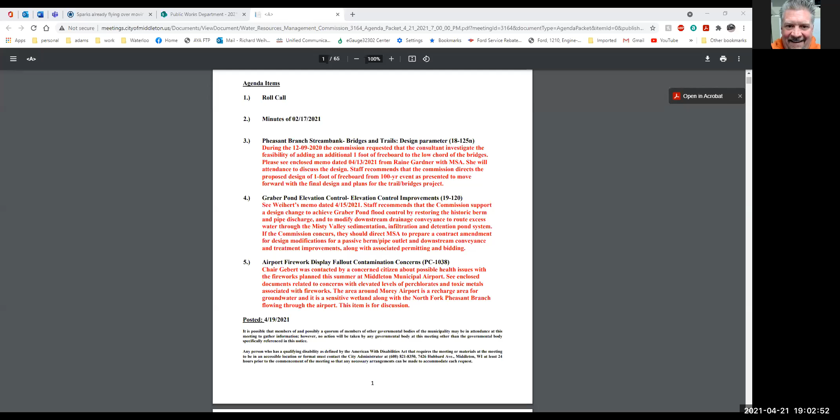At another time to talk about Pheasant Branch. But we wanted to present the findings of the study to the commission before we went to our third public information meeting for this watershed study. So we wanted to inform you all before we put this out to the general public.

So with that, Lauren does have a presentation to share. Does she have the ability to share your screen?

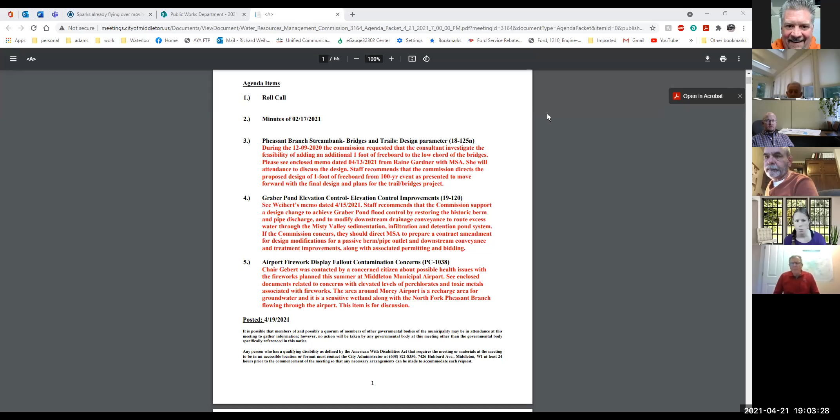I can stop sharing. Not certain how to allow her to do that. I think. Yeah, it's not letting me. Yeah. It said the host has disabled participant screen sharing, Rich. Okay. I don't know how to. I don't either. We'll see if we figure this out. If anybody's got insight. There's usually a little button at the bottom of the screen that's like a little shield and it says something like security. I think I've turned who can share on. Yep, now it's letting me do it. Excellent, thank you for that. All right, so can everybody see the screen that shows a full screen presentation? Yes. Okay, wonderful. Very legible.

Okay, excellent news. All right, so as Caroline mentioned, I am Lauren Striegl. I am an engineer with the City of Madison. I work with Caroline and Janet and Greg, both of whom are here. And I'm going to give you a brief update on the Strickers Mendota Watershed Study. This presentation was adapted from one that we have been sharing internally with agencies, and so it contains a little bit more background than just a straightforward sharing of solutions.

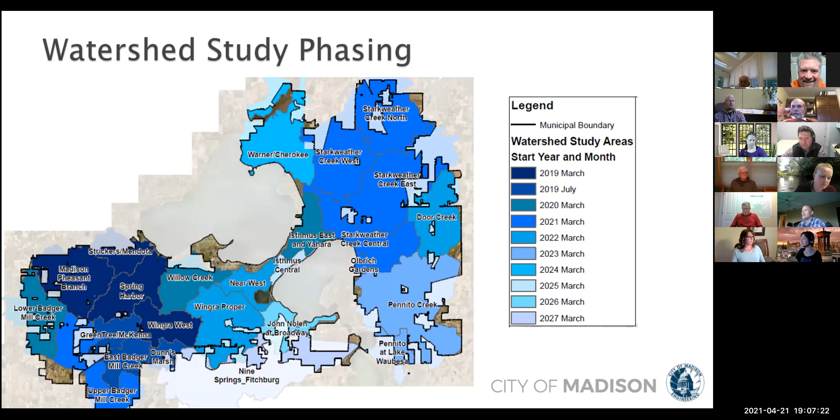And all of those were watersheds that were hit particularly hard in August of 2018, although they were by no means the only ones that suffered quite a lot of damages during those storms. As you can see, this spans 8 years as of right now. So this is a long-term project for the city. We are committed to getting all the way through it, but it is certainly not something that's happening overnight for us.

So to give you a little bit more detail on what those round 1 watershed studies looked like, 3 of them were bid out and were largely completed by consultants. One was done in-house. Caroline Burger led that in-house effort on the Madison Pheasant Branch Watershed Study. The Spring Harbor Watershed Study was completed by AE2S and led within the city by Jojo O'Brien. Strickers Mendota and Wingra West Watershed studies were both done by Brown and Caldwell. I led the city side of the Strickers Mendota study, and Phil Gaebler in our office led the city side of the Wingra West study.

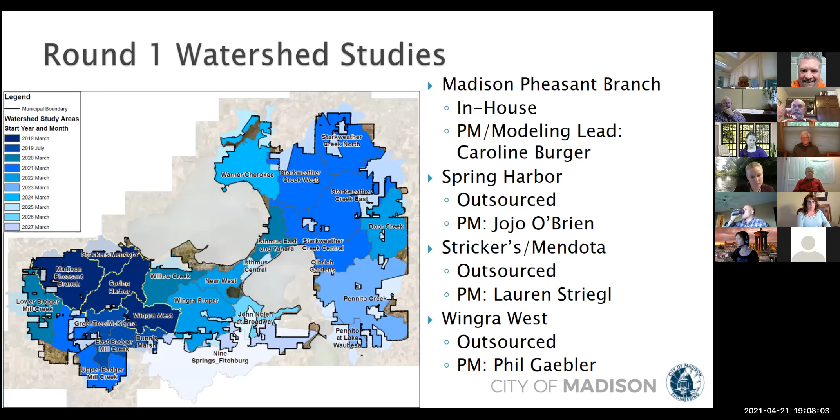Ooh, that was an animation. So this is a look at the schedule, and what this slide is really trying to get across is just how long these things actually take. Why is it going to take us 8 years to get through all of the different watersheds in the city? Well, this is why.

We started this whole process in 2019, and we initially expected to finish it up about a year later in 2020. What we actually found is that there was an additional year in there. Now, this is not something that we're finding in future watershed studies. A lot of this was kinks having to be worked out.

Most notably, we had an issue with the software we started out with. Some of you may be aware that we started this whole process in InfoSWMM and found about halfway through the building of the existing conditions model that that wasn't a great software to use. So we had to have our consultants that were working in round one switch all of their models into a totally different modeling framework. We went to XP SWMM. So it did pad the schedule by about a year.

We are hoping and planning at this point to finish up this first round of watershed studies this summer or fall.

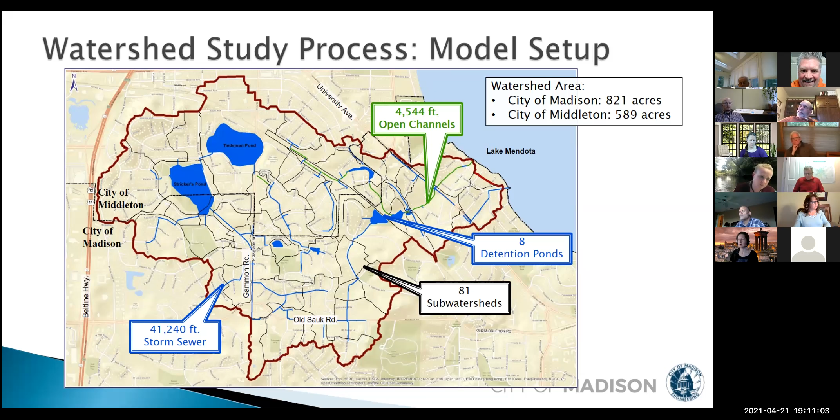And you can see from this that they did kind of a lot more detail on the city of Madison side as we were trying to get a much tighter breakdown of where problem areas were within the city of Madison. And then lastly, about 41,000 feet of storm sewer underground.

So we didn't want to have our consultants just go out and try to build a model with absolutely no background information. So we gave them some data to start with, of course. The first thing that we did was collect a whole bunch of citizen reports. So after that August 2018 storm, we put into place a really extensive flood reporting data collection program.

And we gathered citizen reports within this watershed alone everywhere you see those little blue dots. We also sent our surveyors out. We provided Brown and Caldwell a whole bunch of data from our records, but our data isn't perfect. It's far from perfect. And so in situations where we didn't have great data, where Brown and Caldwell was very concerned that the data that we did have might not be good enough to get really good answers for us, we sent our surveyors out to get a little bit more information.

Third, we scheduled some on-site focus group visits. I'll talk a little bit more about this when I run through pretty quickly our public outreach effort, but this was a new way that we found of getting in touch with people and getting really good on the ground information. So prior to COVID, when we were still all able to meet face-to-face for these first four watersheds, we did actually have our consultant team go out, and Jim is very familiar with this. I think he was the one person that attended all four of these.

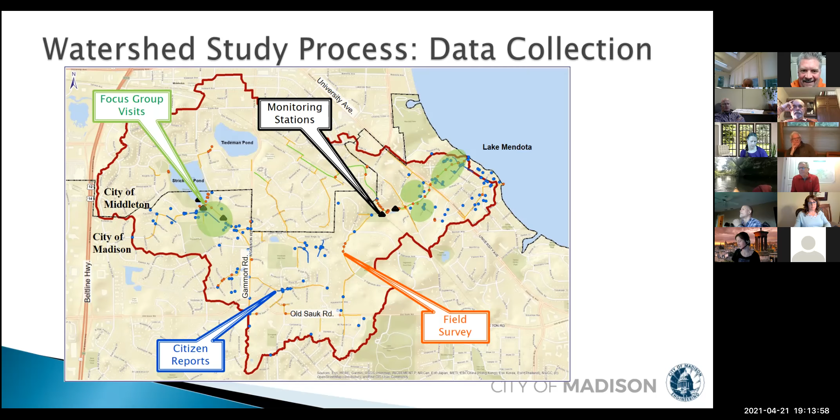This is just a quick synopsis of some of the calibration data, to give you an idea of what this looks like. I won't spend too much time on this because this group is, I'm sure, much more familiar with calibration data than some of the other groups that have looked at this. But this is an example from the Strickers Pond gauge that we installed for one of the calibration events.

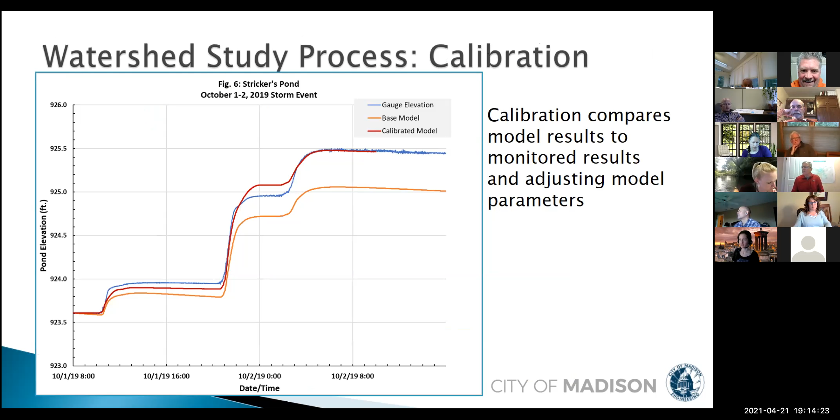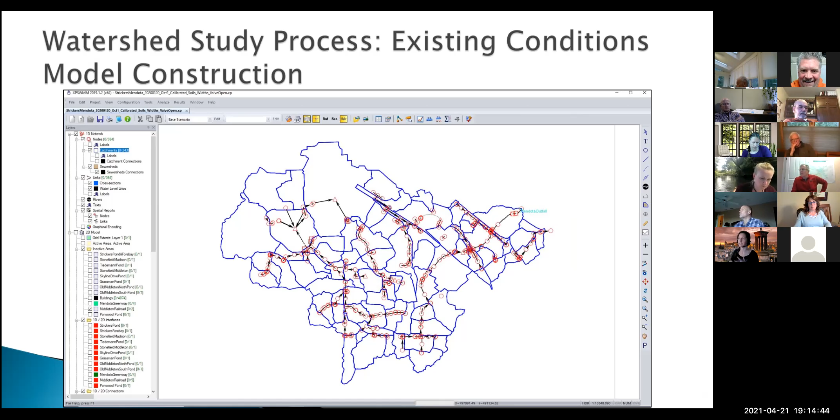This gives you an idea of what the actual XP SWMM model looked like once it was constructed for existing conditions. Like I said, this was one of the simpler watersheds, but it was by no means simple. This was a big model with a whole bunch of different nodes and subbasins, and you can see just how complex it is based on this screenshot.

I wanted to touch briefly on the public input process that we did. This was a new public input process developed just for this watershed study program. So we laid out a framework wherein we would have at least 3 main public input meetings, as well as some individual focus group meetings on site to really get a breadth of public input.

So we started by giving a very broad 'what is a watershed? What is a watershed study? Why are we looking at your watershed' type of meeting in early 2019. We then met with our focus groups on site later that year, at the transition between summer and fall. We gave the neighborhood a view of our existing conditions model in early 2020, which was interesting - this was about a week, if that, before we all got sent home completely for about a year. So we did manage to squeeze this one in under the wire, and it was an in-person meeting.

We were able to talk to residents about what our maps looked like and whether they matched what they had seen in past events. Lastly, we're going to have a public input meeting in May, so in about a month. That's where we're going to try to share the solutions that Brown and Caldwell has developed for this watershed with members of the public, and of course that will be a virtual meeting.

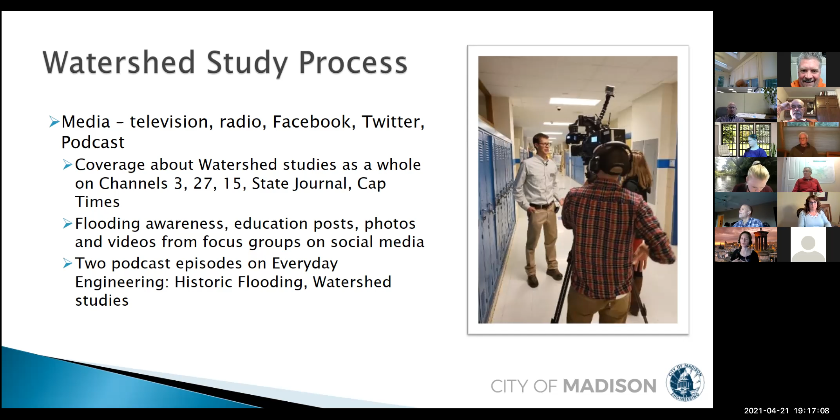We also have a new podcast that Hannah has been pioneering, where she has really pushed flooding issues in that podcast in an attempt to reach a different audience that we might not have reached in the past.

So this is, I'm sure, the best part of this presentation. As we started to get into the existing conditions model and getting flood inundation maps and realizing that we wanted to share them with the public, we spoke to our legal department, our attorneys, and said, can we share all of these inundation maps? And they said, we really need to provide some context because these are pretty technical maps, and we want to make sure that whoever's looking at these isn't taking them as gospel.

These are models. These are not predictive of anything. And we don't want to be in a position where somebody down the line floods or doesn't flood and says, well, your model said I would or wouldn't, and I was making these decisions based on that information. So I hate to actually come back to this, but because I am going to show maps, I have to go through the legal disclaimer.

I will summarize it - essentially it says exactly what I just said. These are not predictive tools, they're planning tools. They're not intended to let you identify a house and say it definitely will flood if this rain happens, and definitely won't if this other rain happens. They're just to give us an idea of general patterns. And the city of Madison assumes no liability if somebody misuses them.

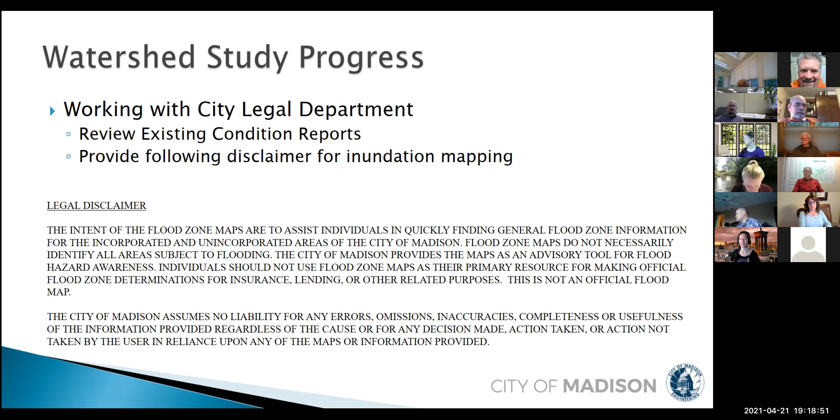So this is a great big map of the existing conditions, 1% chance or 100-year event inundation throughout the first 4 watersheds that we studied. You can kind of see Striker's watershed, just the Madison portion, not the Middleton portion. Up here at the top you can also see, taking up the most space, the Pheasant Branch watershed. Here's Spring Harbor, and down here is Wingra West.

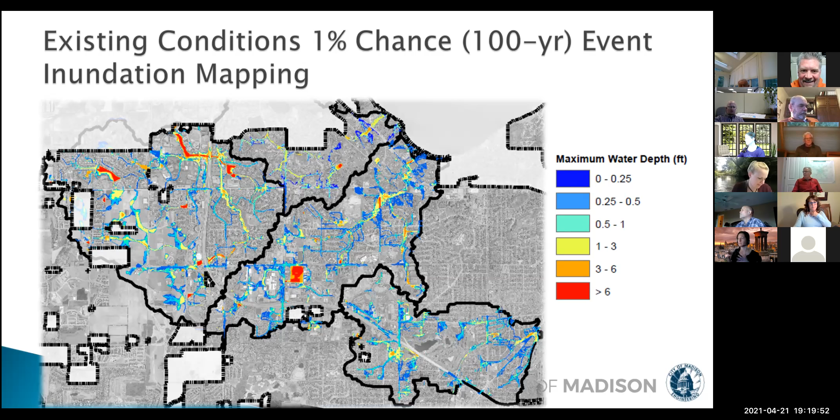We did standardize our inundation maps. We spent a lot of time thinking through what would be the most useful division of depths for us as well as for the public, to help us all figure out whether we were or weren't meeting our flood goals - I'll go through those briefly in a slide or two. All of these depths were standardized and helped us visually latch onto that information pretty quickly.

Just to go through what we had our consultants look at, we went through the whole range of events, everything from the 1-year through the 100-year. We get asked a lot whether we're considering climate change, and whether the 100-year event 20-30 years from now is almost certainly not going to be the 100-year event you're looking at today. We definitely know this is a possibility, if not a probability, but it's hard to quantify something we can't predict. So the way we've chosen to address this at this point is to take a look at each of these watersheds under the 500-year event.

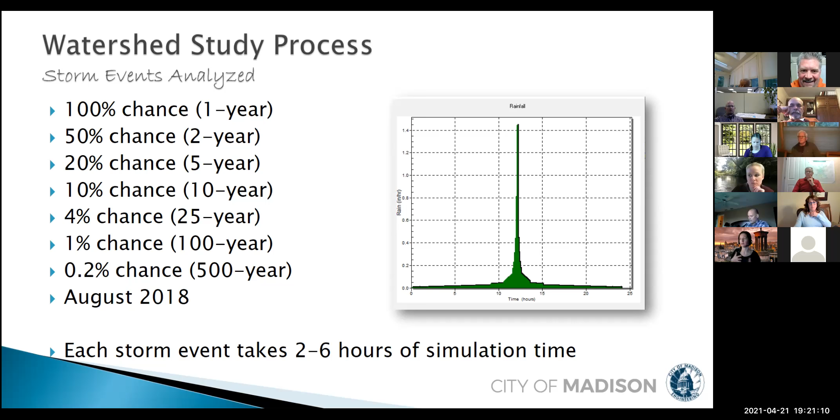Lastly, we did have our consultants model the August 2018 event, using rainfall data that a professor at UW, Professor Dan Wright, put together for us based on radar from that event. So we got a really good spread in areas that we didn't necessarily have rain gauges set up at the time. We largely did this because it's a great event that people remember and were able to quickly respond to us when we showed them the maps and say, yeah this happened, yeah this didn't so much happen, you should adjust this.

So briefly, what were we actually trying to evaluate when looking at these maps? They're very pretty, but how are they useful? We put together a whole list of targets that we were trying to hit, and used this to evaluate in each watershed, and in each place within each watershed, whether or not our infrastructure was robust enough to withstand flooding.

For the 10% chance or the 10-year event, we usually like to convey that within our underground storm sewer system. So what we wanted to make sure was that we weren't seeing surcharging out of the storm sewer system past some nominal surcharging as water gets into inlets. We didn't want to see significant surcharging onto the roadway.

For the 25-year event, or the 4% chance event, we were really focused on maintaining emergency vehicle access. We wanted to make sure that larger emergency vehicles could still get through roads, particularly main arterial roads like Gammon in the Striker's Mendota Watershed during that 4% chance event. Our criteria there was 0.2 feet or less of ponding at the center line of the road.

For the 1% chance event, we were targeting having no structure flooding. And we want to have all of our greenway crossing culverts sized such that those crossings can carry the 100-year event without overtopping the road.

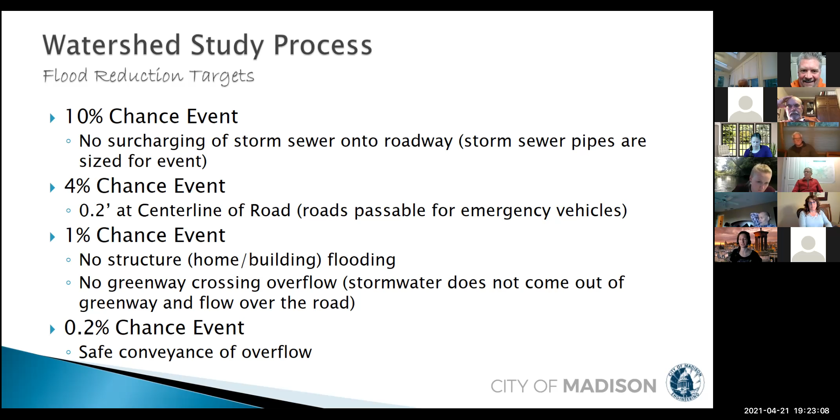Then lastly, for the 500-year event, we know that's huge, and most if not all of our infrastructure is not sized for that, and in a lot of cases cannot be upsized for that, especially in developed areas. So what we were looking to get there was just safe conveyance of overflow during that 500-year, 0.2% chance event.

This is just very briefly what we did once we had all of these existing conditions models and how we took those to a proposed solutions place. So this is a really quick rundown of what we did.

Essentially, once we had those existing conditions models and knew where our problem areas were, we had the consultants meet with the engineering staff internally in the city to brainstorm ideas. Nothing was really considered off the table. We wanted to look at what it would take for each of these problem areas to meet those goals that we went through a slide ago.

Then our consultants went through, refined the ideas, started to conceptually size all of these mitigation measures, all of these flooding solutions, and then took those solutions and plugged them into the model.

And then they began some iterations, kind of back and forth with engineering staff. What does the model say? Are we meeting what we want to meet? Do you want us to keep going? Are we getting unreasonably expensive or just into something that we can't actually build?

And this continued as we spoke internally with our agencies. This continued until we arrived at a set of solutions for each of these watersheds that we felt were buildable, were reasonable, and were something that we could present to agencies and to the public.

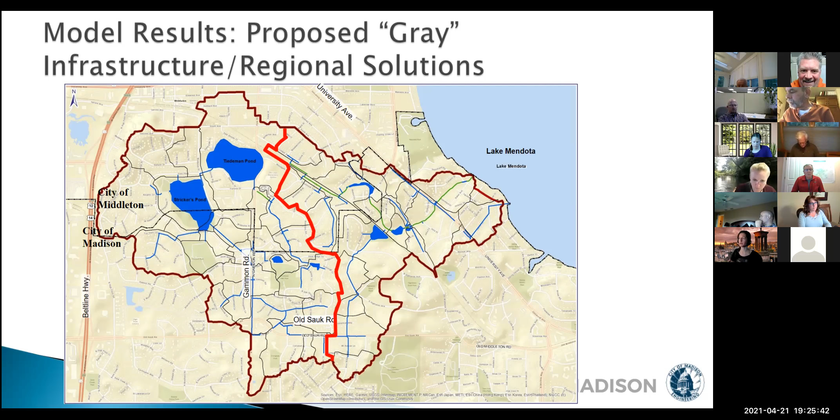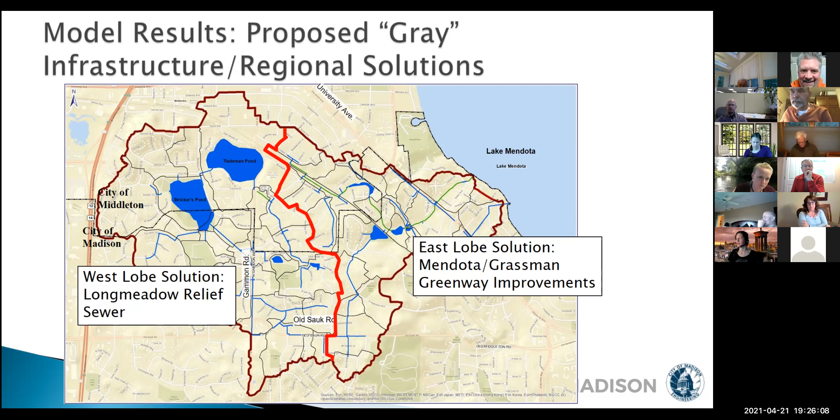The one that I will spend more time on, that comes second, and is probably of most interest to this commission, is the Longmeadow Relief Sewer. That was the West Lobe solution for the Strickers-Tiedemanns area. One that only affects our property, and that the City of Madison is actually moving forward with into design, is improvements to the Mendota Grassman Greenway.

So I'll go over that one first because it is completely contained within Madison property. What was really important in this area, in the eastern part of this watershed, was to prevent structure flooding during the 1% event. There are several condos out here. This is the Hickory Hollow Condo Association that have reported a lot of flooding in the past. In addition, the Julia Street and Julia Court area has also reported a lot of flooding. Some of that is due to groundwater, but a lot of it is due to surface water.

So when we asked Brown and Caldwell to look at this area, what they found pretty quickly was that this greenway, which is very wooded and not very well graded, was ripe for improvement. What they ended up proposing was essentially lowering and better sloping this greenway, and then increasing the culvert capacity underneath the main roads that cross it, to try to get water as quickly as we can out of this greenway and into Lake Mendota downstream.

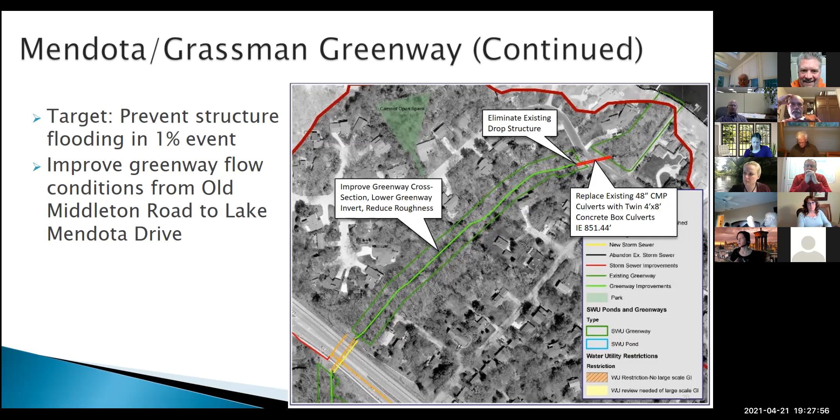So what this looks like in the western part of the greenway is essentially improving that cross section within the greenway and adding a new parallel culvert right next to the existing box culvert that's in place there. Downstream of that, it looks like again improving that greenway cross section, lowering it, reducing the roughness through there, and then replacing some old corrugated metal culverts with higher capacity twin box culverts downstream.

On the western side of this, what Brown and Caldwell found was the most efficient solution was to install a parallel 60-inch, or 5-foot, relief sewer that runs right adjacent to an existing City of Madison storm sewer, shown in orange here, and will cut off the hydraulic connection at Harvest Hill from the old storm sewer and divert all of that water through this new 5-foot diameter storm sewer. It will discharge into Stricker's forebay, as does the existing storm sewer, and then into Stricker's pond.

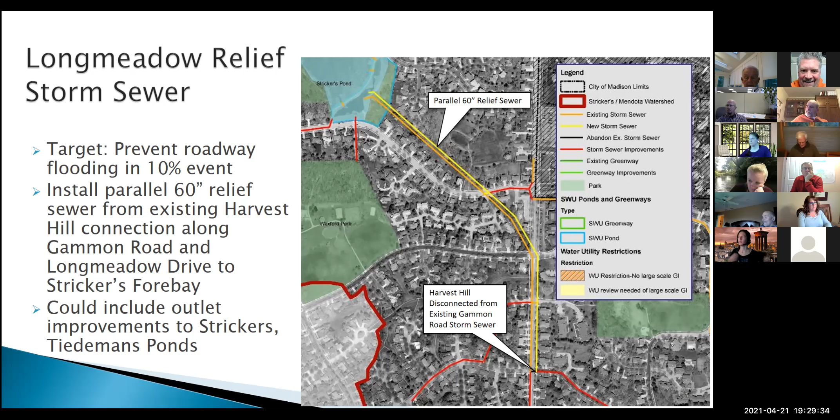One thing that Brown and Caldwell recognized, and that the City of Madison recognized, is that this would involve conversations with the City of Middleton. Obviously, Middleton is downstream of this solution, right downstream of Stricker's Pond. So we're aware this might involve parallel conversations about improving the outlets to Stricker's Pond and Tiedemans Pond, to make sure we're mitigating any potential negative effects to the City of Madison or Middleton. Brown and Caldwell did find that there were pretty negligible effects on Stricker's Pond's water surface level, but we know these conversations have to be had.

Lastly, I want to touch on something really important, if sometimes overlooked. These big regional solutions are great and critical, but they're nothing if we can't get the water to where it needs to go to take advantage of them. So Brown and Caldwell looked at this watershed and noted everywhere local pipes need to be upsized to get the most benefit from our big regional solutions. Everything you see in red, barring the border of the watershed itself, is pipe that eventually has to be upsized. This is a multi-year, probably multi-decade process. We'll get these projects done through resurfacing and reconstruction projects, but this isn't going to happen overnight. Even if we installed these big regional solutions tomorrow, this is an ongoing process for each of these watersheds.

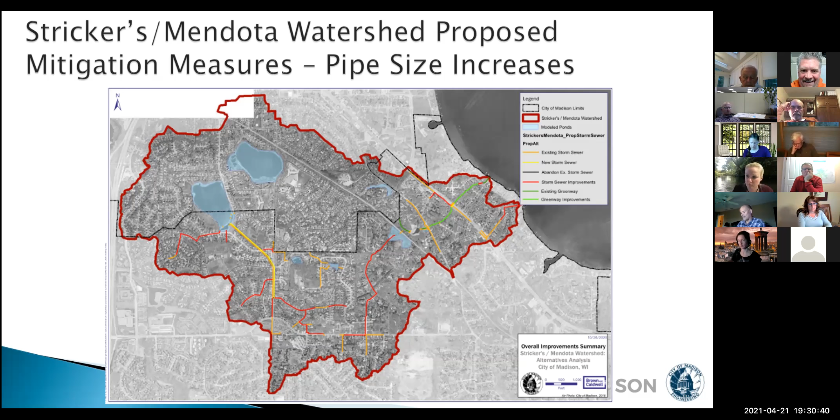So what are we doing next? Aside from PIM3, where we present all this to the public — well, this is kind of an outdated slide, but it does mention we still have to meet with agencies and stakeholders. We did that, having a whole bunch of conversations with other agencies within the city that were really concerned about this, Parks being the big one. We had to go through anywhere we proposed detention in one of our parks and talk to them. Stakeholders includes the City of Middleton, and that's why we're here tonight, to go through this and see what your concerns are and take those into account as we move towards finalizing everything.

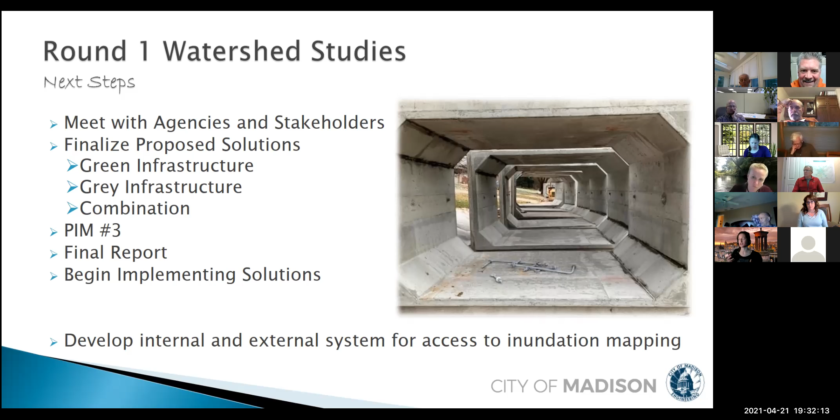So Brown and Caldwell, once we complete this conversation and go through PIM3 to get input from the public, will move on to writing their final report. We want to make sure every stakeholder's voice is represented in that report. The last step, just one bullet here but with a wealth of information, is to begin implementing solutions. For this watershed, we're moving forward with the Mendota Grassman Greenway improvements, but a lot of these solutions we're just starting to figure out when we could even begin implementing. So even though it looks simple and is written easily here, this is going to be, again, a multi-year, if not multi-decade, process to bring these solutions into reality.

So with that, I am finished. If you have any questions, I can answer them, Greg or Janet can answer them, or Caroline can answer them. We're all kind of at your disposal — whoever is best equipped will jump in.

Well, thank you, Lauren. I appreciate the speech here, or whatever this is, and you did a great job with it. Yeah, thanks, that was good. Is there any questions you have for Lauren?

I have one question. You didn't say anything about decreasing the amount of water by infiltration or something like that. It looks like most of your solutions are transporting the flood peaks more efficiently. So in the end result, it's like Mendota is going to get more water faster.

That is an excellent point. I'm sorry, was that Warren speaking? It's a little hard sometimes for me to see, but that ties in really nicely to a part of this study I didn't speak much about.

There's a component of this that is more green infrastructure focused — we call it the volume control infrastructure portion. Caroline is the lead on that. In parallel to all these solutions, Caroline is looking at the Pheasant Branch watershed, and we're also having consultants do this in a couple other select watersheds, namely the Wingra West watershed and the Willow Creek watershed, to see how we could implement a large-scale green infrastructure program in the City of Madison and how that might affect some of these proposed solutions. That study is still in its infancy and we don't have data on it tonight, but it's definitely something we're looking at. We'll have more information to come, especially as Caroline wraps up the Pheasant Branch watershed study.

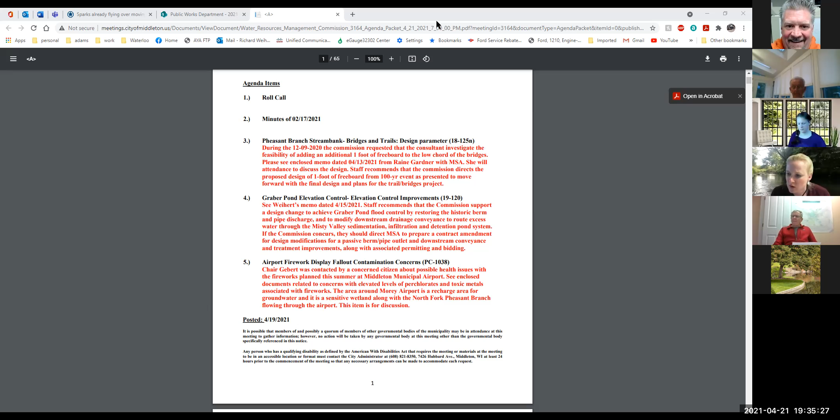Raine, up to you. Thank you again for having me. Excited here to provide an update to everyone as it's been a few months. So I don't know, Rich, do you by chance have the memo that you can pull up or do you want me to share? Maybe. Because I can definitely try to share here.

Looks like I can. So back in December, we had a good discussion on our analysis thus far on the various bridges along the corridor. And what we were able to do then was take some past study information on the corridor for the bridges and get you some approximate and rough ideas as to what we were looking for as we look forward to designing and setting the bridges on new abutments and what elevations they would need to be set to.

And so when we left that meeting, the direction was, at a minimum, we wanted to make sure that we got the bridge abutments, that bottom low chord, 1 foot above the 100-year storm event. And then also to consider what 1 more foot above that elevation would look like for the various bridges. And so over the last month, we were able to work with Cardno and the model and get our information updated into it for each of the bridge locations and do our analysis even further with actual data from the corridor now.

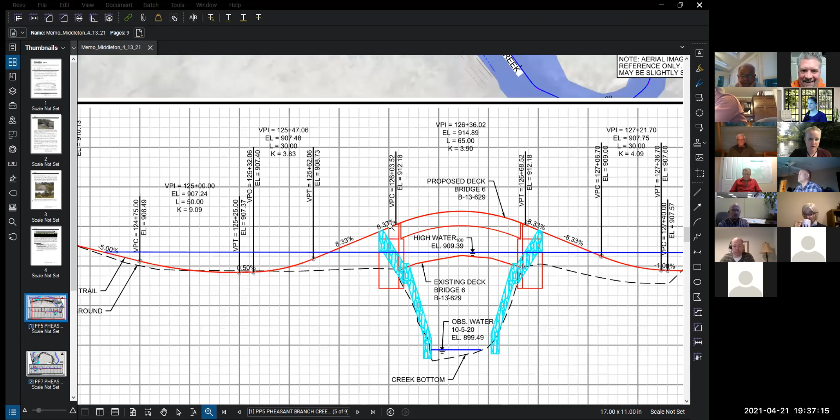And so the first thing that we looked at was setting the bridges at that 1 foot above, so that low chord elevation. And if you remember, the bridges are that arched frame. I'll actually try to zoom in a little bit more. They're the arches. And so what we're looking at is getting that 1 foot at the lowest point of the bridge above that 100-year storm event.

And so with that, we were able to look at all the bridges except for number 4, which we need to get the final survey information in, which we are working on this week, and working on that final modeling piece. So I know that one bridge is missing from this data set, but all of the other ones are included. And we were able to set all the bridges as shown in the plans that were attached. And we looked at how we can tie in the side slopes for the trail up to it, and what that would look like, because last time we talked about several different options as to how the trail would tie into the bridges when they're set up this much higher.

So with that, I'll quickly jump into it: we did go down the path of trying to look at that additional 1 foot above this elevation to get 2 feet above, and what that would look like and what that storm protection would be. Unfortunately, the model was only built out to the 100-year event. So we were able to look at what 1 more foot would do, but not really give you quite the guidance as to what that storm event would look like, and what that protection level would be, I should say.

So with that though, going up 1 more foot in this design, you can already see that with us trying to tie in these bridges at the elevations that they are, this 8.33% is basically our maximum slope that we really want to go to with tying and feathering in the trail to the bridges. So if we were to set the bridges 1 more foot up, it would really draw out that connection into the existing trail. And the one thing I want to point out is that in all, except for 1 bridge, the bridges will still at the 100-year event have some sort of level of bypass flow.

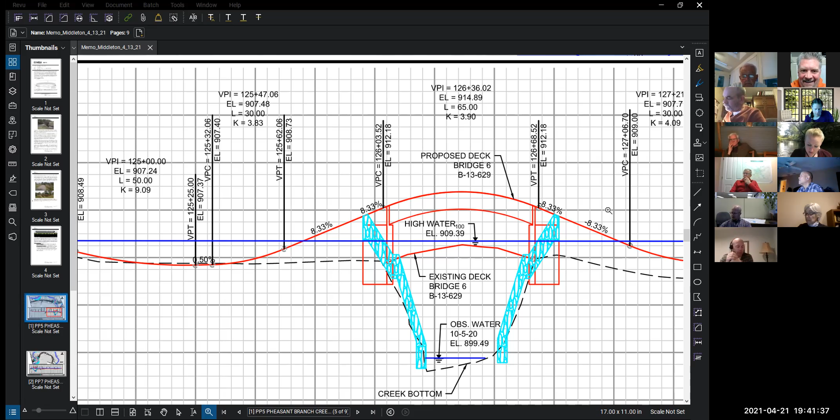So when we had talked back in December, we had provided some rough costs as to what these options would look like. And with this recommendation, I had provided that similar chart shown in here with updated costs based on the numbers now that we do have. And when you look at all these bridges, we did add in the cost for riprap and railing, because we are going up so steep, we will need some additional railing coming off the bridges for safely keeping people on the trail leading up to the bridges. And obviously there's the riprap to protect the abutments.

And so when we spoke on the cost in December, we noted that originally the city had spent around $70,000 to repair the bridges to get them back to the state that they're in right now. And we recognized at a base cost minimum, you would need to spend $522,000 to set the existing bridges back on their abutments. And that was with a concrete abutment on top of helical piles as our recommendation.

Now that we know roughly where these bridges are going to be set with the 100-year 1 foot protection, with those costs and the riprap and the railing that's needed, it would be around the 717, so roughly just under $200,000 of additional cost to get the bridges up above the 100-year for that additional protection, which overall is very similar in cost to what I think we presented last time, not a whole lot more, and you're getting that benefit from raising them up. Are there any other questions so far?

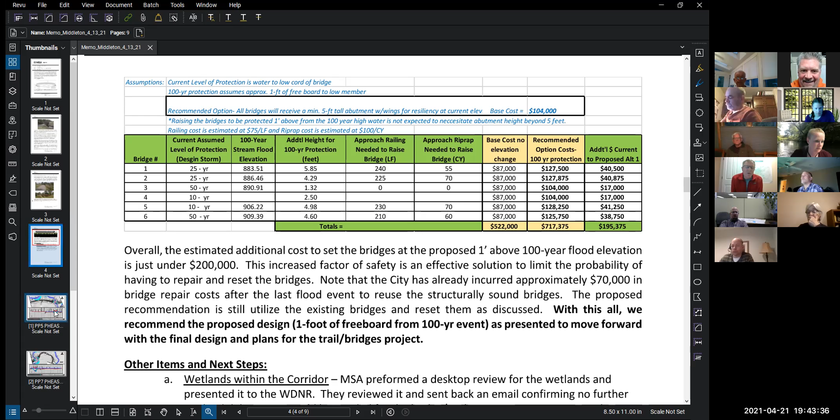Yeah, this is Jim. Just wanted to clarify, make sure I understand that 8% slope you looked at. Does that exceed ADA requirements? So when it comes to trails, we actually can exceed that 5% slope because of the terrain and the topography and tying it in. So we can actually get up to that maximum percent. You actually can go higher than 8.33, but we don't recommend it. Yeah, because 8.33 can be pretty steep already. Yep. But in this case, we can apply the guidelines and requirements, we can do the 8.33% as we tie into those bridges. So that is what we would be at with your recommendation. Is that correct? Correct.

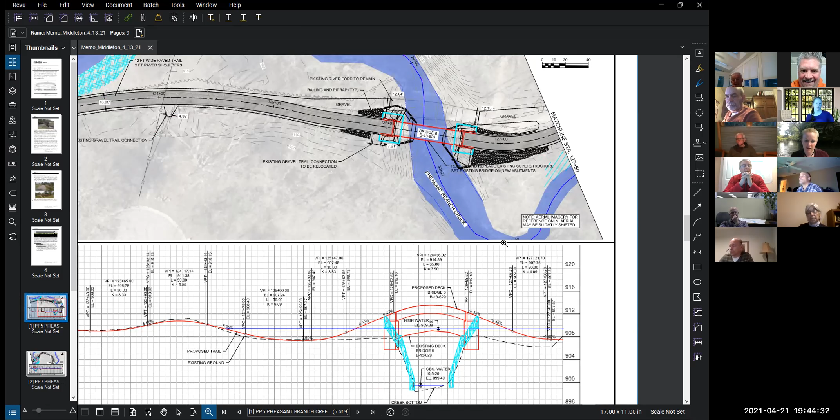If that wasn't acceptable to have that steep of slope, we probably would be looking at doing some sort of boardwalk at a lesser slope to tie in. Because if we were to fan out that slope and lessen it, we're going to be tying out further, which obviously then reduces the capacity of the bypass flow, which then we might be wanting to look at the need to do the boardwalk, which would allow the water to go underneath it, but obviously adds a fair amount of cost to the overall project.

I guess I wanted to hear from Mark. I assume the parks people are more in tune to this situation, if that 8% is acceptable to the parks people or not. Given the length that 8% would be at, that is what we're okay with.

I know, if you were to go over by PPD on the South Fork Trail that goes up behind there, goes up that hill, that is pretty similar in terms of percentage slope. And then we've got little flat areas before it goes into that slope again. So for that certain distance out of that 8.3, yeah, we would be fine with that. It's definitely preferable, like Rain said, than to have a boardwalk. That's for sure.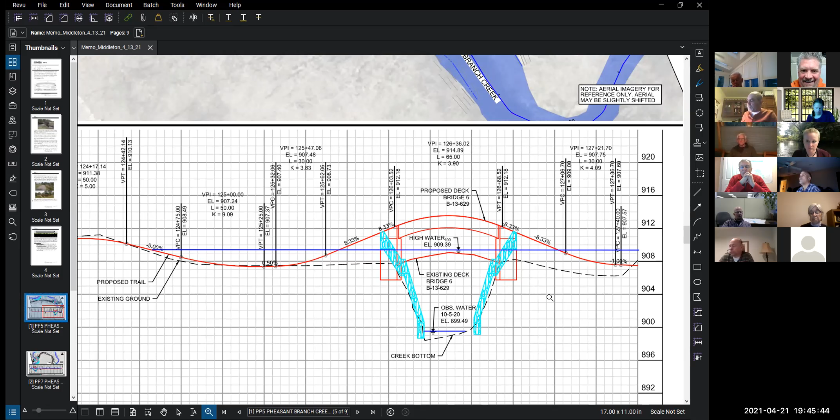Is this true for each bridge crossing, or just only certain ones that we'd be at that? I think actually all of them have some level of that 8.33 tied to them. Do note though that the bridges themselves, because they are arch bridges, from one end to the center of the arch is actually 8.33% too. So the bridges actually have that same slope. So we're just matching into that. I know biking up an 8% slope, that's a climb if it's too far.

Okay. With that, I just had a couple other points. Like I said, we're working on bridge number 4 to model it, to understand where that one needs to be set, and hopefully we'll have that information by the end of this week. And so that all impacts, in general, if you're going to go with the recommendation we're providing, we'll have to work with Cardinal to balance the cut and fill within the corridor to make sure that what we're filling for the bridges and what they're cutting for their restoration project balances, and we'll need further review of that.

I also had a note in here, wetlands. We did reach out to the DNR. We've gotten confirmation from a desktop review that there is no further delineation needed based on this work. We'll continue to work with them though on the other permits and what else is needed within the project. So does that conclude your presentation, Erin? It does, unless somebody has any other questions. I wanted to keep it short and sweet for you.

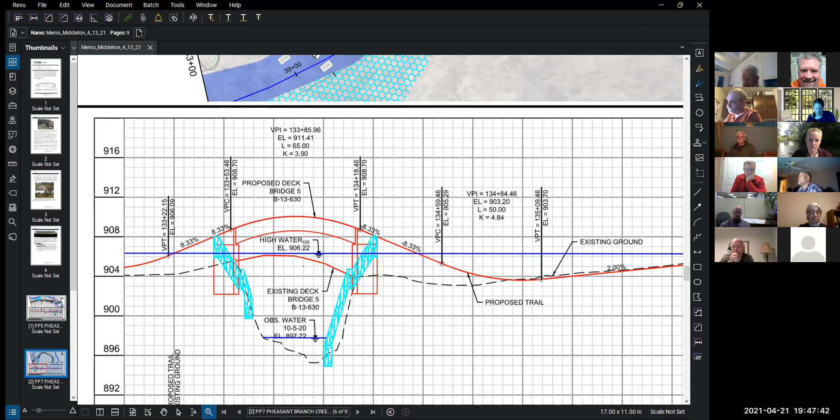Yeah, we appreciate that. So Rich, what we're looking for is a motion for approval of this concept. Yes, that's correct. So essentially, the staff recommends the commission directs the proposed design of 1 foot freeboard from the 100-year flood as presented to move forward with final design and plans for the project. So we need a motion to that extent.

I'll move. Ken Potter. Potter moves. Do we have a second? Ramsey will second. Okay, we have a motion and a second. So all in favor of approval? Aye. Aye. Opposed? And the motion's carried. Okay, thank you, Erin. Thank you.

Warren, if I could interrupt, we did not approve the minutes. Oh, yeah, forgot about that. That's okay. That's what I'm here for. Yeah, let's go back and have a motion for approval of minutes. Move approval of the minutes. Ramsey. Do we have a second? I'll second. Thank you, Ken. Okay, we have a motion for approval and a second. All in favor? Aye. Aye. Minutes are approved. Okay, the next item then is Graber Pond elevation control.

So Rich, do you want to introduce that, where we are on that? Sure. Last time at a meeting, we paused the permitting or continued permit application for the design that MSA had provided us due to some objections from the Friends of Pheasant Branch about invasive species and maintaining that as a kettle pond. So we paused that for a little bit.